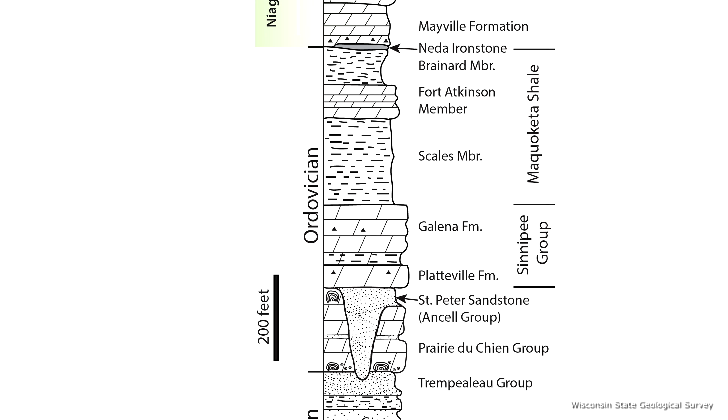For the purposes of our story, one of the primary bedrock strata laid down was during the geologic period known as the Ordovician, more than 450 million years ago. Then, within a warm, shallow inland sea, tens of feet of calcium carbonates were laid down in sediments from the exoskeletons and shells of trillions of arthropods, mollusks, and diatoms, creating a rock formation known as Galena dolomite, hard, structurally sound stone, often used in building.

Millions of years later, the sea receded, and the area became a shoreline, at which point many tens of feet of mud sediments were laid down, which transformed into a deposit referred to as Maquoketa shale, a blue-gray, soft, crumbly rock, unstable when exposed to air and water.

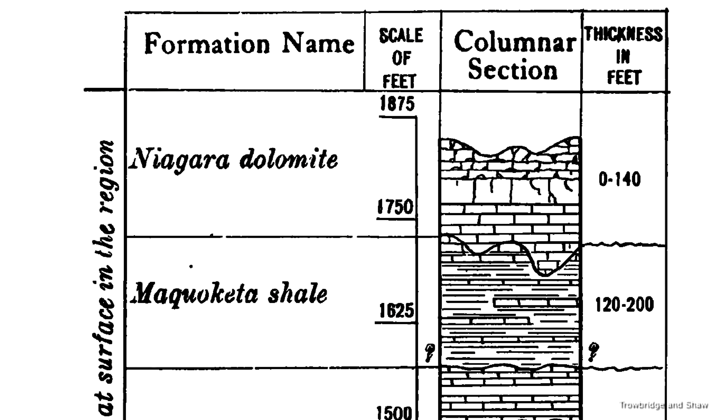After more deep time elapsed, in the Silurian period, the shallow sea returned, once more depositing tens of feet of sediments, which again transformed to dolomite, this time in a deposit known as the Niagara Formation.

Fast forward to the mid-1880s, when a 45-year-old railroad executive, Alpheus B. Stickney, was energetically building a new railway, the Minnesota and Northwestern Railroad, from Minnesota to Iowa, taking advantage of customer dissatisfaction with more established lines, such as the Chicago, Burlington, and Quincy Railway.

By 1886, he had already created a railroad from St. Paul, Minnesota to Dubuque, Iowa, leveraging a merger with the Dubuque and Northwestern Railroad. But Stickney's plans did not stop there. He was eyeing the lucrative market of Chicago, 160 miles to the east.

But from the outset, Stickney had a problem. It wasn't getting across the mighty Mississippi, more than a mile across, as he was able to work out an amicable deal with the Illinois Central Railway to use their railroad bridge at Dubuque, Iowa.

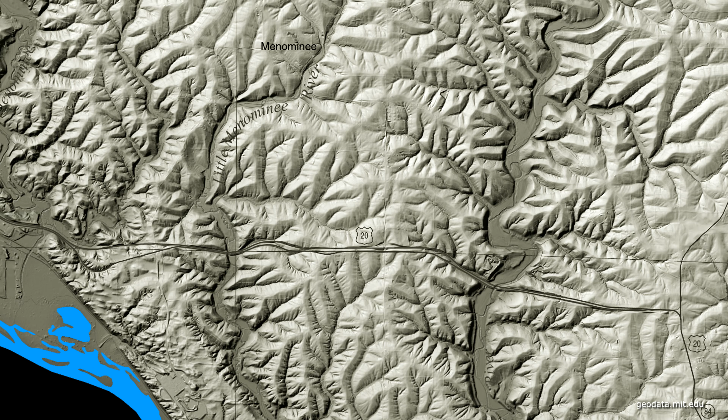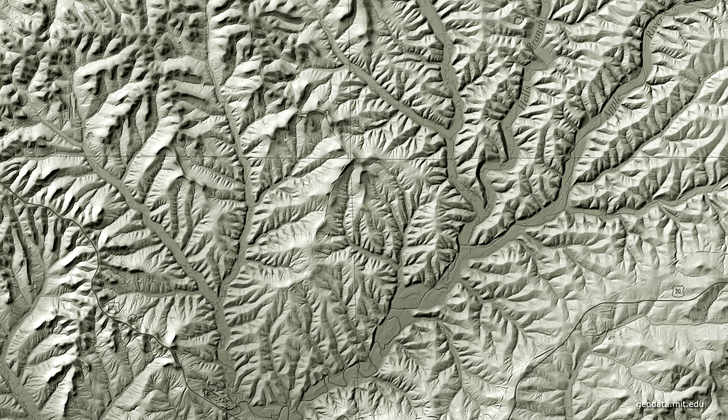Rather, it was getting from East Dubuque across Jo Daviess County, with its high ridges and escarpments, formed hundreds of millions of years ago in shallow seas, and which had largely escaped the great leveling of Ice Age glaciers in more recent geologic times. Stickney didn't know it at the time, but this was to be his great white whale, which he was to chase for nearly 2 decades.

While Stickney's surveying and railroad crews built a new railroad from Forest Home, just to the west of Chicago, to South Freeport, the final link to Stickney's railroad puzzle across Jo Daviess County was to take much longer.

Multiple routes were initially considered, including one that took the line through Galena, then eastward through Muddy Hollow, then southwest to Elizabeth. However, the route chosen would instead take them south along the Mississippi, sharing space with the Chicago, Burlington, and Quincy line, then into Rice Township, then passing beneath a 1,000-foot-high ridge, before passing southwards and then north again to Elizabeth.

Railroad engineers had estimated that a tunnel through the Rice Township ridge would be difficult, but doable, as the area was known to be largely underlain with strong structural stone, dolomites from the Ordovician and Silurian periods. In fact, outcroppings of these light-colored stones can be seen at hundreds of places throughout Jo Daviess County.

They estimated that the tunnel would be anywhere from 1/3 of a mile to 1/2 of a mile in length, depending upon the final surveying work and the condition of the tunnel approaches.

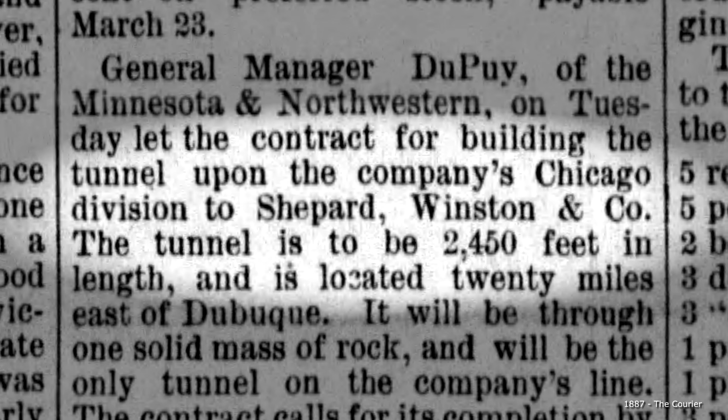The tunnel was expected to be a difficult task, but work that the railway's primary contractor, D.C. Shepard and Company, was confident of undertaking. The tunnel project was to be largely a Minnesota affair. David Chauncey Shepard, who did much of the contracting work for Stickney's railroad, was a Minnesota-based contractor. Shepard was a native of New York, a wealthy man, and now approaching 60 years of age.

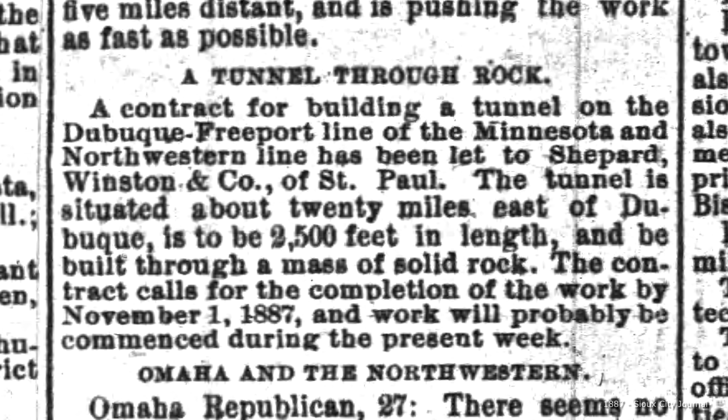Perhaps he needed an energetic junior partner, someone who could be more hands-on with the tunnel project, as well as the Minnesota and Northwestern route from Chicago to Freeport. And so he temporarily partnered with another St. Paul-based contractor, Fendall Gregory Winston, a native of Virginia, who was 25 years Shepard's junior.

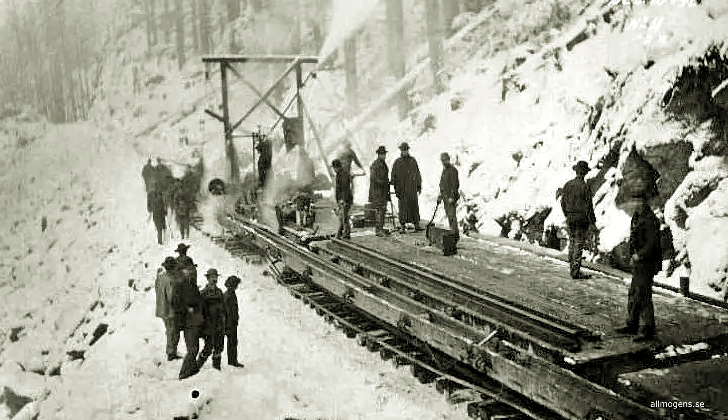Together they formed the contracting firm of Shepard, Winston and Company, and they in turn hired other Minnesota-based subcontractors. These contractors and subcontractors did hire some local laborers, but mostly seeded the project with their own cheap immigrant labor from Minnesota, these being Swedes and Finns, with a seasoning of salty Germans.

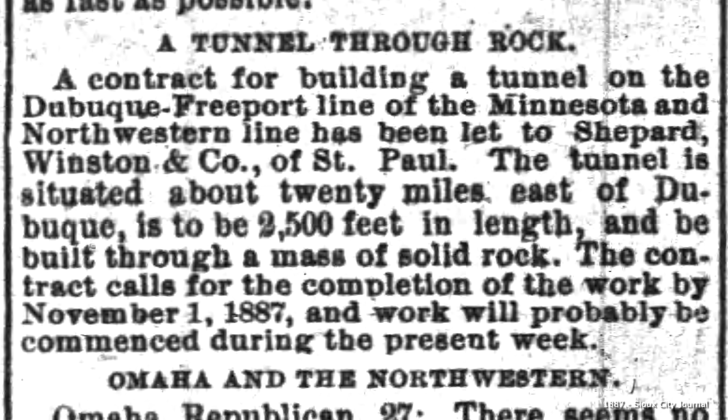The contract for the tunnel work was signed on March 1, 1887, with an optimistic completion target of November 1st, just 8 months away. The first carloads of Swedish laborers from Minnesota, numbering 50 or so, arrived in Galena via the Illinois Central Railroad in the first week of March, 1887.

Laborers quickly got to work, clearing away timber from the proposed route and preparing the tunnel approaches. The eastern approach was going to require the most work, as they had to create a substantial cut, 1/3 of a mile in length, deep into the side of the ridge. The western approach had its own set of challenges. The cut was to be shorter, less than 1/4 of a mile in length, but then a new ridge needed to be built and ballasted in order to ease the road down grade towards a trestle bridge that would span across a 75-foot deep chasm and more than 200 feet across.

The tunnel itself would be on a 1% grade, sloping down from east to west.

The first recorded death occurred less than 10 days into the project, while working on the tunnel approaches, likely the western approach, that being the death of John Hill, a 31-year-old Scandinavian immigrant who was hauling spoil from the approach cuttings via dump cars using a narrow-gauge trackway. Long wooden poles were used to brake these gravity-powered cars, and while Hill was seated in one of the loaded spoil cars, as it traveled downhill, a brake pole from a nearby car suddenly broke and flew into the back of Hill's head, killing him instantly.

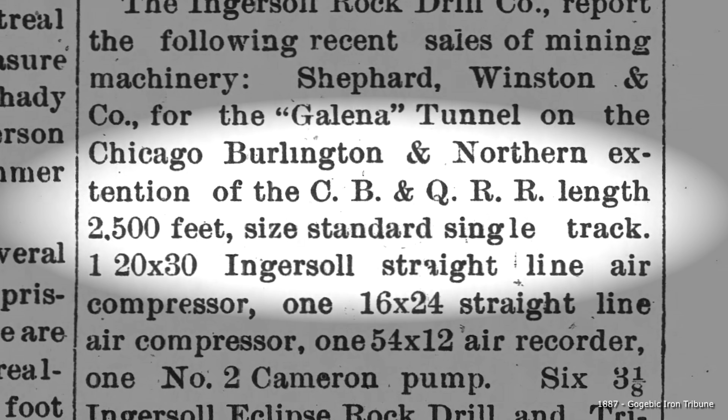By the first weeks of April, the actual tunnel work began, bolstered by the arrival of 300 or more new laborers. Mining and drilling equipment also arrived by the carload, including air compressors, drilling machines, and pipes. Teams were set up at both ends of the tunnel, the west team drilling east and the east team drilling west. A third work gang was placed at the summit of the hill, about 1,000 feet east of the west tunnel portal and 1,500 feet west of the east portal, boring a hole more than 200 feet deep to the level of the trackway. The shaft would be used for ventilation and to enable miners to dig outwards, east and west, to meet up with the miners working from either end of the tunnel. A steam-powered elevator positioned at the shaft's opening would be used to raise and lower men and materials.

2 more accidents soon marred the tunnel project. In late April, a dynamite charge went off prematurely before a young engineer from Iowa had time to get away. A large stone hit him squarely in the head, knocking him unconscious. But he fortunately recovered hours later.

A more serious accident happened a few days later, when a large bank of earth in one of the approach cuts caved in on Albert Helt, a 39-year-old German laborer, who died shortly after he was dug out of the hole. In his passing, he left behind a wife. A later inquiry absolved everyone of blame.

Early on, workers found the tunnel slow and laborious, working through mostly clay and shale deposits. Nonetheless, about 160 small cars of spoil were loaded every hour to be carted out from the site and dumped. But engineers began to realize that they had drawn a poor hand in the tunnel construction, as it was evident that the tunnel was cut directly into the Maquoketa shale layers, not in either the Galena or Niagara dolomites above and below. The hardness of either dolomite layers would have made a strong structure for the tunnel, and they knew how to cut through it and work it using dynamite. Whereas the shale was crumbly, becoming unstable as it was exposed to air and moisture, falling to bits, and had to be worked arduously using a pickaxe.

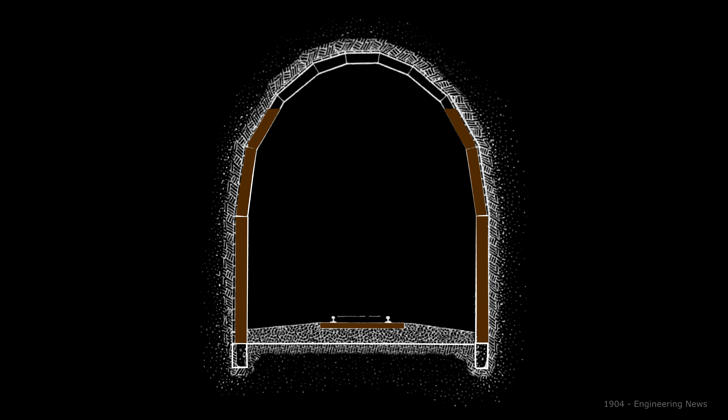The unstable shale required that the walls and ceiling be carefully braced as they advanced forward. The opening had to be lined with 12-inch timbers spaced 4 feet apart. The gaps between support timbers were filled with loose stone, and timber arches were set on steel beams between the timber posts. Because of the need for additional bracing, they had to bore the tunnel a few feet wider and taller than expected, significantly increasing the material to cut and remove.

After more than 3 months of digging, by late July, the west side of the tunnel had only advanced 300 feet, while the east entrance had only just started. The central shaft team had reached the tunnel level and managed to bore out 150 feet in the middle, leaving more than 2,000 feet left to dig.

The extreme heat and humidity of the Midwestern summer was taking its toll on the laborers. Many reported being too ill to work. One young Swedish immigrant laborer, suffering from heat exhaustion, drank a large volume of cold water, then complained of feeling ill before passing away a few hours later.

Typhoid, cholera, and dysentery were always present in these work camps. Subcontractor J.C. Kohlberg of Minneapolis had just completed his contract work regarding the western approach of the tunnel, but dysentery overtook him at the work camp, finishing him off a few days later in Galena. 26-year-old tunnel worker and Irish immigrant Daniel Carney died of typhoid after falling sick at the tunnel.

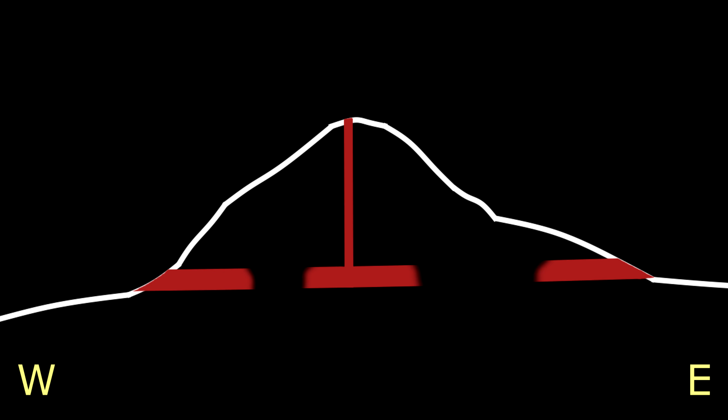By mid-October, the tunnelers had achieved the halfway point of the 2,500-foot tunnel. Just a few weeks later, they had cut through another 200 feet, completing 1,400 feet of the bore. Optimism began to spread. The work was either getting easier, or they were becoming more adept at handling the intractable shale. In anticipation of completion, subcontractors began shipping their horses and wagons back to Wisconsin and Minnesota. Shepard and Winston, too, were selling off their wagons and horses. Now the Minnesota and Northwestern began openly talking of completing the tunnel by January 1st, with trains running shortly thereafter.

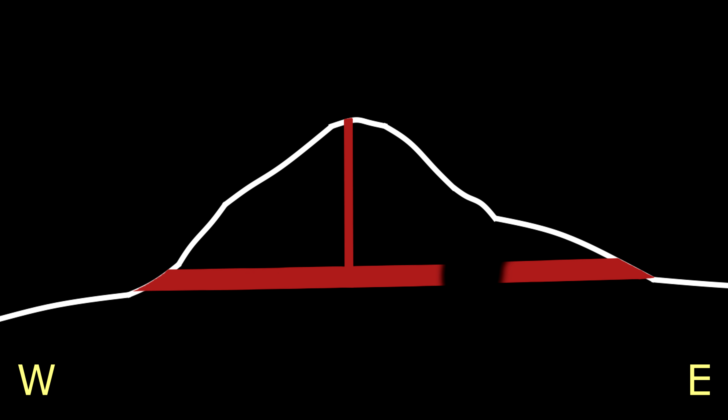Within weeks, in early December, 2 of the 4 teams were able to meet up, breaking through the remaining walls. For their reward, those workers were promptly laid off and paid off, many of them finding their way to Freeport to fill up on whiskey on the way home.

Then finally, on December 22nd, the remaining 2 teams working from the east and west met, creating an opening large enough for them to walk through. In anticipation of completion, photographers and local dignitaries were being given guided tours of the tunnel as the workmen sped through the final tasks of completing the tunnel opening and bracing the walls and ceiling with timber and brick.

The tunnel, 25 feet wide, 30 feet high, 2,450 feet long, and built for a single trackway, was officially completed on Sunday evening, the 1st of January, 1888, 10 months after starting.

Contractors Shepard and Winston pronounced the tunnel ready for iron, turning it over to the railway with relatively little fanfare, which was the custom on Stickney's railroads. Railroad tracks were laid within a few weeks, and the first locomotive passed through the Rice Township Tunnel on the evening of Thursday, January 19th.

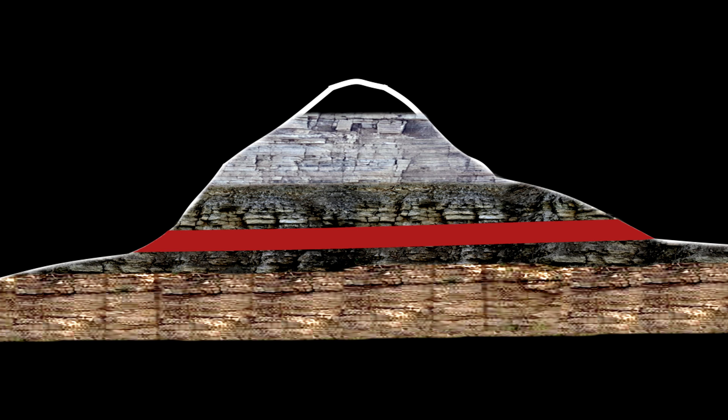This was the last piece of Stickney's puzzle to build a highly competitive railway between Minneapolis, St. Paul, Iowa, and Chicago. Despite early mistakes in engineering and geology, they had managed to construct the longest tunnel in Illinois at that time. By sheer force of will, Stickney had landed a harpoon in his white whale. But the project had gone significantly over budget, costing the railway more than $600,000, or almost $18 million in today's money. Several people had lost their lives in the endeavor, with many others sustaining serious injuries.

More trouble started within weeks of the tunnel turnover. Groundwater from above was found to be constantly dripping through the tunnel ceiling, and the tunnel drainage was not sufficient to carry the seepage away. The standing water was freezing on the tunnel tracks, and train operators held their breath every time they passed through it during winter. Within months, the railway put in a new station east of the East Tunnel portal, referred to as Tunnel Siding. A U.S. post office with the same name was established there as well. But this stop and post office only lasted a few years, and no longer appeared on train schedules by 1892.

During construction, the tunnel itself was referred to as the Minnesota and Northwestern Tunnel. But after the railway transformed into the Chicago, St. Paul, and Kansas City Railway in late 1887, the tunnel took on the name the Rice Township Tunnel, or the Rice Tunnel, a name which it held onto for decades, even into the first part of the 20th century.

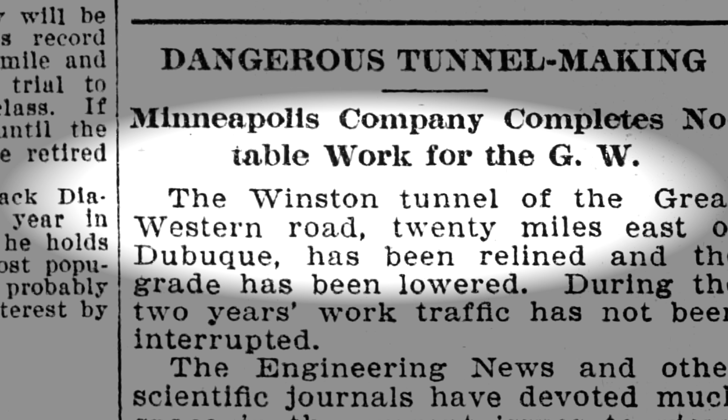The Winston Tunnel moniker did not appear until the first few years of the 1900s, and that seemed to be coincident with the reestablishment of the East Portal station stop, which was also reestablished and renamed as Winston in 1903. Why the station was named for Winston rather than Shepherd, who was the senior partner in the contracting firm, is something of a mystery. Perhaps Fendall Winston had shown more of a hands-on role in the tunnel project, or perhaps the railway was throwing a bone to the Winston brothers, who continued to do contracting work for the Chicago Great Western after David Shepherd had retired.

The water-related troubles that beset the young tunnel were not solved, however. In the spring of 1891, heavy storms caused widespread flooding in Jo Daviess County, and the tunnel suffered a major cave-in, which buried the west end of the tunnel in mud and shale for more than 300 feet of its length. The cuts of the east and west approaches also experienced significant landslides, blocking train traffic. More than 80 laborers in 2 shifts worked tirelessly for weeks to clear the tracks and to bolster the timber supports that lined the tunnel. More timber wall supports and ceiling arches were added at this time.

Railroad General Manager John Myers Egan, whom we met earlier during the Egan Station episode of this series, visited the tunnel to investigate the condition of the walls and ceiling. When he alighted from the train in the middle of the tunnel, he sank quickly into mud that was waist deep. Locals were quick to dub the shaft the Mud Tunnel.

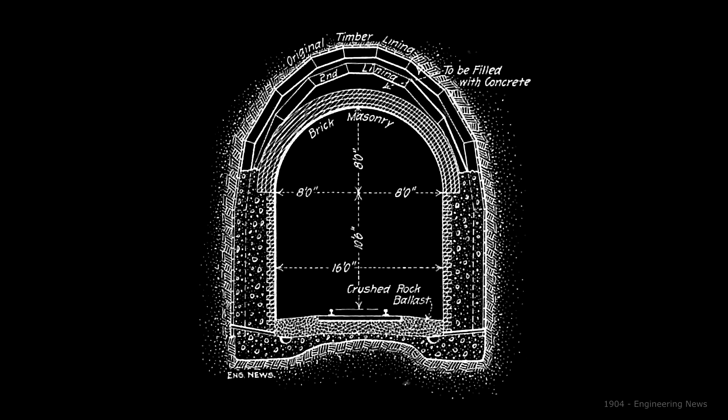To prevent tunnel cave-ins and approach landslides once and for all, the railway drew up extensive plans to increase the size of the tunnel bore, so as to create concrete walls with a brick lining 3 feet thick. The wood-timbered ceiling was to be augmented with iron arches and a 4-course arched brickwork with a 16-foot diameter. The space between the original arched timbers and the new archwork was to be filled in with concrete.

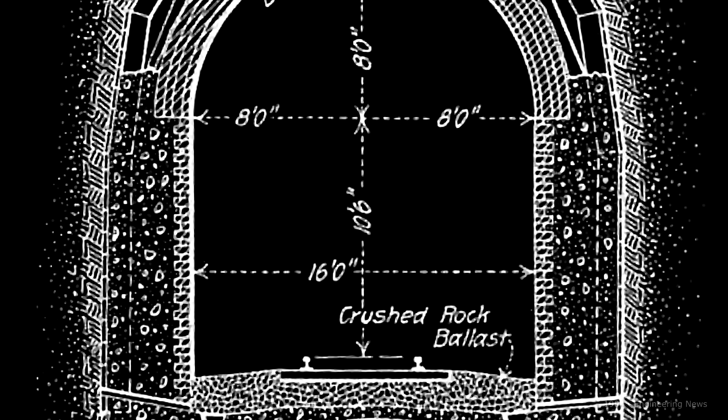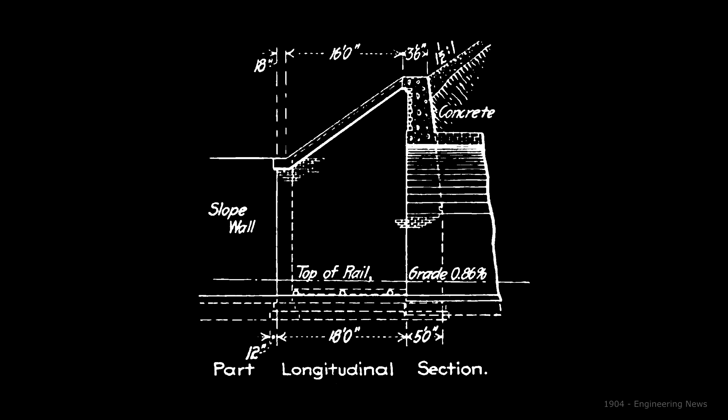The tunnel floor was to be dug out by an additional 2 to 4 feet, so as to allow for the lowered ceiling, deeper wall foundations, and a 6-inch concrete resurfacing of the entire tunnel floor, atop drain tiles and stone fill. They would also significantly enhance the tunnel portal openings with new concrete arches, copings, and side buttresses. The tunnel approaches would also be shored up with stone retaining walls on both sides of the cutting.

The work for these improvements started in 1902. The firm Lorimer, Gallagher, and Walsh of Chicago was hired as the contractor. However, progress was slow, as they initially had difficulty finding laborers to do the work.

Laborers were being compensated $2 per day, while bricklayers were rewarded with $6.25 per day, or $55 and $170 per day in 2022 money. The contractors also had to contend with 12 to 15 trains passing through the tunnel every day, with their contract stipulating that traffic must not be significantly interrupted during construction.

As early work progressed, another accident occurred. In October of 1902, local laborer Frederick, or Fritz, Schoenfeld, aged 19, was killed when he was thrown from a heavy machine that he was operating within the tunnel.

The tunnel reconstruction work continued in 1903. Bricklayers, frustrated with the heavy smoke being generated by the constant train traffic, requested that tunnel traffic be temporarily suspended. Then another cave-in occurred during the tunnel work in June. Although no one was seriously injured, 50 men walked off the job.

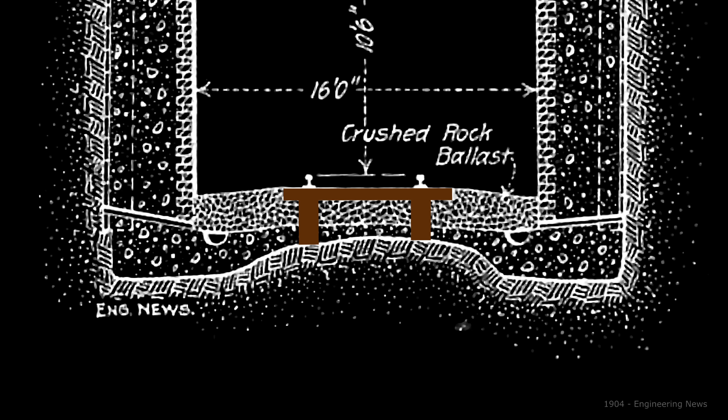In order to allow train traffic through while the floor was poured, they blocked up the railroad ties and rails along the approaches and the tunnel above the new floor level. Another 12 inches of gravel ballast was laid over the new concrete floor.

By the end of 1903, the tunnel floors, walls, and approaches were mostly complete, and the new arched ceiling had just started. For the ceiling, iron ribs were placed every 5 feet.

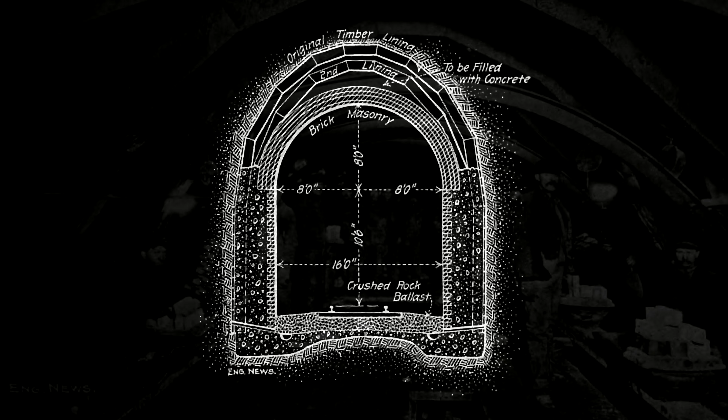Bricklayers worked quickly atop boxcars with bricks and fresh mortar passed up from the train car below. Concrete was then used to fill in the gap between the old wooden beam ceiling and the new brick and steel ceiling. As the boxcars were moved quickly in and out of the tunnel with every train passing, the bricklayers were greatly vexed by the residual smoke from these trains.

Ventilation was always a problem for the tunnel, and it was going to get worse in the coming years. In spite of these challenges, the tunnel reconstruction was finally completed in the summer of 1904. The more constricted tunnel dimensions were now 16 feet wide by 18.5 feet at the top of the arch.

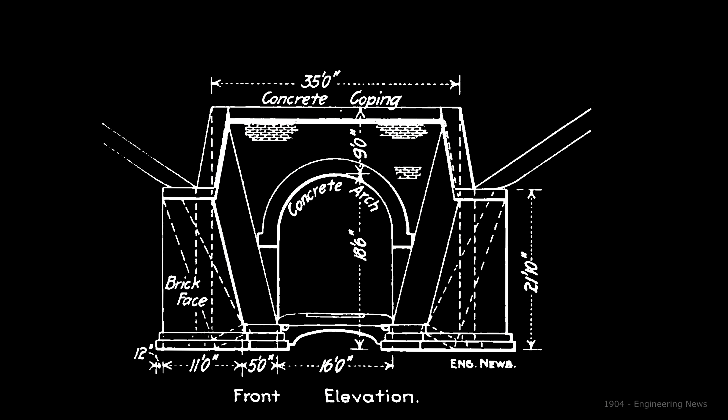In total, they had used 15,000 barrels of cement, 11,000 cubic yards of gravel, and 2.5 million bricks, at a cost of about $100,000, or about $3 million in 2020 money. The tunnel had finally been given vital finishing touches relative to the 1887 tunnel boring of Shepherd and Winston.

With tunnel traffic now fully opened and double tracking from Galena Junction to Stockton in place, the single trackway of the tunnel was going to present a safety problem for the railroad, as both eastbound and westbound trains would be competing for the same trackway through the tunnel.

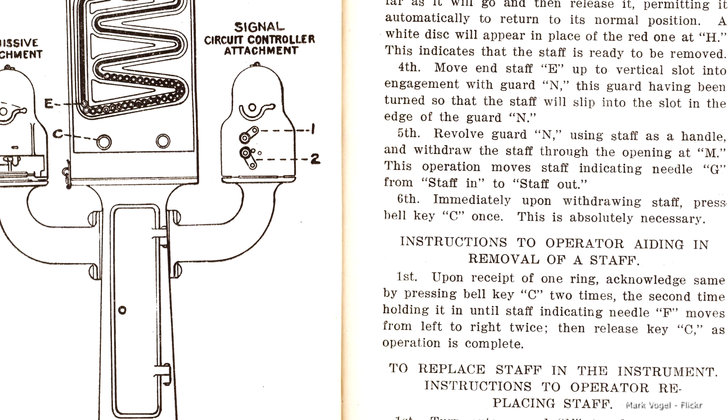In 1905, the CGW put into place something called a staff system, a system used elsewhere to protect gauntlet tracks, drawbridges, and train tunnels. Effectively, only trains and their engineers carrying a staff token, a metal key, could pass through the tunnel, and there was only one staff token available at any given time, controlled by the station operators and a special staff machine, one at Winston on the east side and one at Aiken, later Rice station, to the west of the tunnel.

A staff key on a hoop was passed to engineers by the station operators as they entered the tunnel area, and then was thrown down on the opposite side to be retrieved by the far end station operator. By 1908, the railroad that Stickney built was in financial trouble, and the company went into receivership.

The railroad was bought by J.P. Morgan and Company, who reorganized it and put Samuel Morse Felton in charge. Whereas Stickney was known as a builder, Felton was seen as a consummate manager of operations. Not surprisingly, Felton's attention eventually turned to the troublesome tunnel in Jo Daviess County, Stickney's Great White Whale, which had cost the upstart Chicago Great Western dearly over the decades.

The Illinois Central Railway, too, was hurting the railroad's pocketbook by charging heavy tolls for the CGW trains passing over the IC's bridge across the Mississippi between Dubuque and East Dubuque.

Felton was considering new different routes between Stockton and Iowa, including one from Rawdon to Bellevue, Iowa, and another from Stockton to Maquoketa, Iowa, thereby bypassing both the IC's Dubuque Bridge and the troublesome Winston Tunnel. But the prohibitive cost of the new railroad bridge over the Mississippi was not in the plans for Chicago Great Western. Remember that Felton was a manager, not a builder.

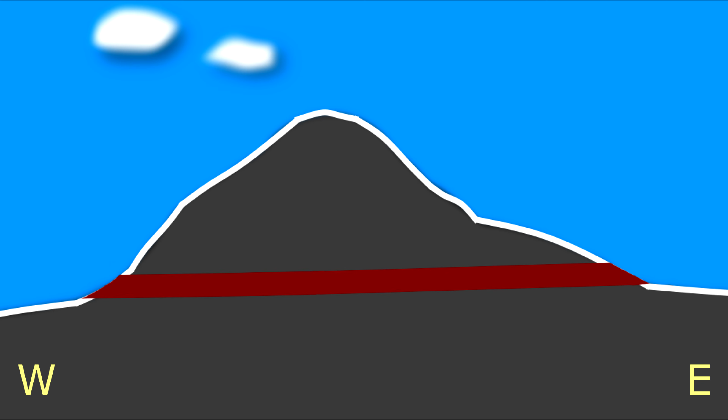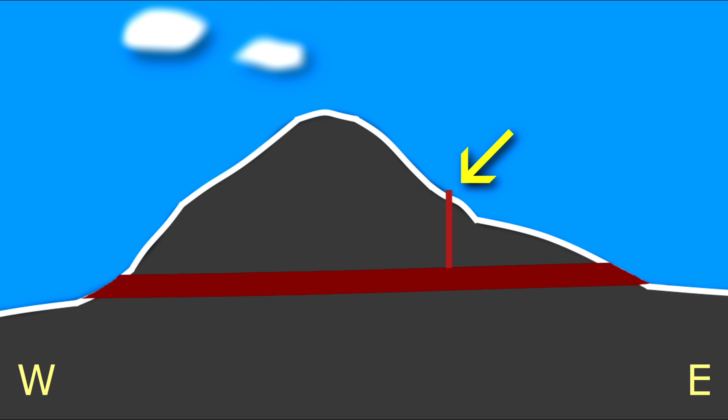Starting in 1912 and extending through 1913, the Chicago Great Western built a massive new ventilation system for the tunnel, drawing air out of the western portal rather than the ventilation shaft, which was now situated about 800 feet from the eastern portal and was about 6 feet in diameter.

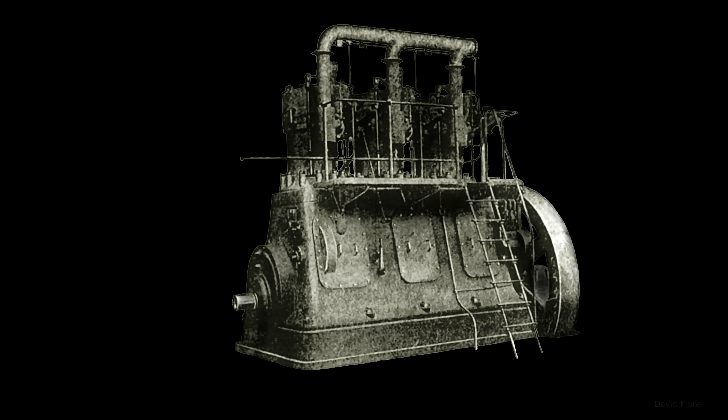To do this, they built a powerhouse and fan house on the north side of the western tunnel entrance, backed by a 22-foot-high retaining wall to prevent landslides. The two-story brick powerhouse was 22 feet by 24 feet in dimension and housed a diesel-fueled 180-horsepower engine. Via large belts, this engine drove a fan in a fan house just to the east of the powerhouse. This was truly a huge fan, 12 feet in diameter, spinning at 170 revolutions per minute, delivering fresh air to the tunnel at 280,000 cubic feet per minute.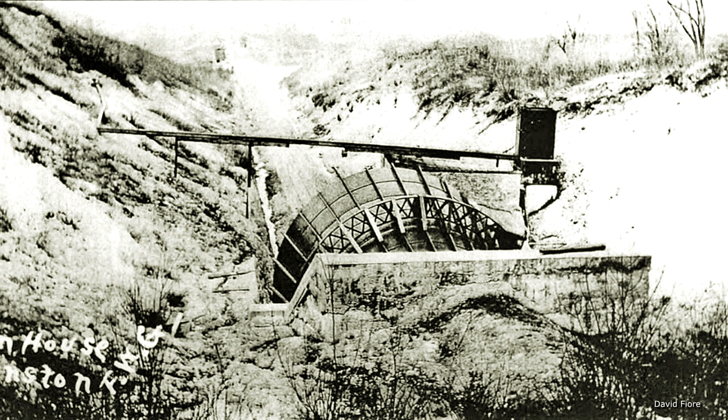The outlet of this fan was attached to a newly built giant steel nozzle shroud surrounding the entire western portal, extending out 50 feet from the tunnel opening. When in operation, the new ventilation system blew at nearly 60 miles per hour at the west end of the tunnel and 16 miles per hour at the east portal.

Pity the poor bird that happened to fly past the western portal when a train arrived. One wonders, too, what overwhelming sounds the diesel engine, the fan, and the steel nozzle made as the fan spun up to speed. The fan was turned on only when an eastbound train was passing through, and both east and westbound trains were to limit their speed to 10 miles per hour through the tunnel.

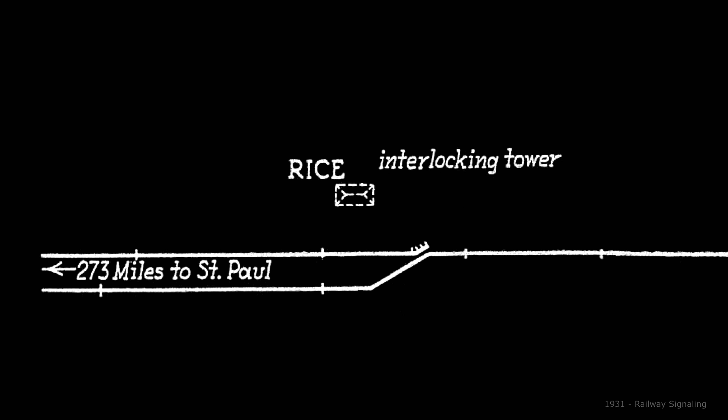There were two 12-hour shifts for fan operators, which manned the fan house 24/7. Fan house operators typically boarded at the Rice station to the west and would walk 1 mile to the tunnel or ride there via a handcar to start their shift. In fact, the Rice station first appears shortly after the installation of the new ventilation system and may have been located there primarily as a lodging place for both tunnel fan house operators, as well as moving the staff system operator there from Aiken.

Although this new system generally solved the tunnel's ventilation problem, troubles persisted, as the ventilation system would often fail due to broken engine belts. During those times, fan house operators would toss a wet towel to eastbound train engineers to alleviate the effects of the train smoke. Passengers, meanwhile, were on their own.

As the U.S. entered World War I, the Great War, in 1917, the U.S. government sought to protect key infrastructure assets, such as railway bridges and tunnels, throughout the U.S., the damage or destruction of which could seriously harm the U.S. economy and ability to wage war. As such, in the summer of 1917, 24 National Guardsmen were put on duty to watch over the Winston Tunnel, thereafter replaced by a small band of railroad detectives after the Guardsmen left in August.

Another effect of the war was the constriction of the male labor pool in the area. Remote and rural areas were especially hit, as there were few men to take the available railway jobs. Fortunately, there was a second half of the population more than able and willing to do these jobs, and in 1917, 18-year-old Hazel Mugen of Rice Township became the station operator at the West Tunnel portal at Rice. She admirably filled this position for many years before being promoted to the station agent at North Hanover, sometime after 1930. In time, she married Oscar Altenburg in 1935, retiring from her railway career in 1941, after more than 20 years of service.

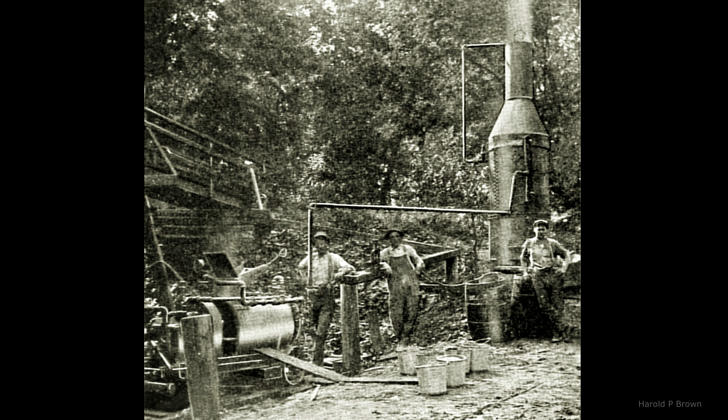The original concrete floor was breaking up due to frost heave and an unstable substrate. Contractors were brought in to spray the brick walls and ceiling with a hot concrete solution, building up a facing layer of concrete 1/4 inch to 1 inch in thickness. A new 12-inch thick concrete slab was also poured beneath the tunnel's rail bed to give the tunnel a solid new floor.

At about this time, another accident occurred at the tunnel, this time taking the life of Leo Clifford Noah of Galena. He had been a railroad employee at the tunnel, working as a section hand along with his father. Both of them were on their way home in early July 1919, but Leo lagged behind. He was later found dead in the tunnel in the late afternoon, lying across the tracks, having been struck by a train.

In 1931, looking for ways to reduce costs on the railway, the Chicago Great Western replaced the staff control mechanism and operators that had been controlling access at both ends of the tunnel since 1905 with a new automated tunnel control system, a CTC, or Centralized Traffic Control Mechanism. This automated system could be controlled by a single operator, who could oversee both the fan and the tunnel access, located at the fan house to the west of the tunnel, using a specially designed signal and switching machine. This enabled the CGW to reduce staff at both the Rice and Winston stations, saving the railroad $7,000 per annum, or more than $80,000 in today's money.